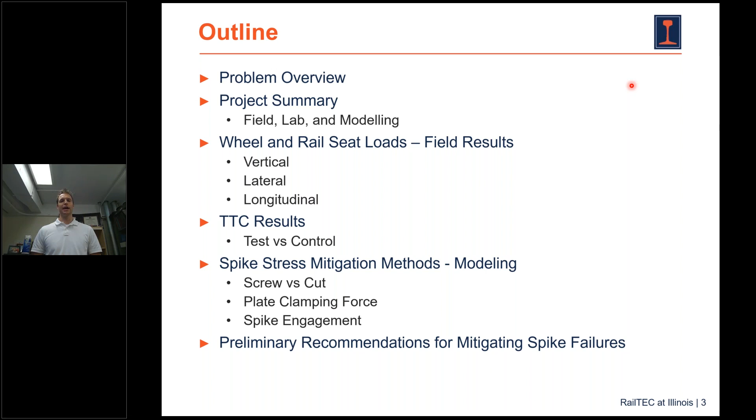with tonnage. And then finally, I'll wrap up by hitting on some modeling results that shed light on why we saw what we did at TTC, as well as give a couple other recommendations for how we might mitigate some of these failures moving forward.

So some background on these spike failures. I think we can very strongly assert that these failures are occurring due to fatigue. It's not a material deficiency, and this doesn't happen in just one type of elastic fastener. It's not just cut spikes—it can also occur in screw spikes as well. We believe this is overloading of the screw spike, leading to a fatigue failure, especially when we look at some of the failure surfaces.

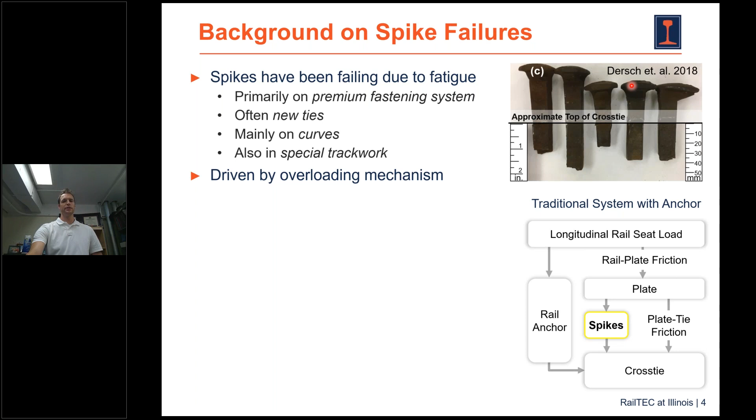Riley hit on this in the introduction. It's led to at least 10 derailments that we've been able to specifically link to this that's caused rapid gauge deterioration and wide gauge derailments. One of the most famous of which is the Mosier, Oregon derailment that occurred in 2016.

If you notice in the bottom right of slide 4, we have a very simplified version of how the load will be transferred from the rail to the cross tie. In a system that uses spikes and anchors, a significant amount of longitudinal load will actually go through the rail anchor into the cross tie, and some will go through rail plate friction to the plate into the spikes.

But the majority in these anchored systems with no elastic fastener will go through that anchor. We believe one of the driving factors leading to these failures within elastic fasteners is actually the loss of this anchor. Therefore we now see an E-clip that is bringing that longitudinal load into the plates, which means the spikes and the plate-tie friction now have to carry the entirety of that longitudinal load.

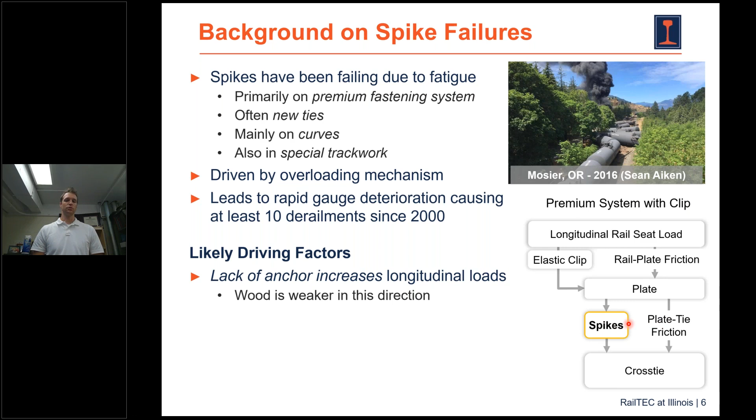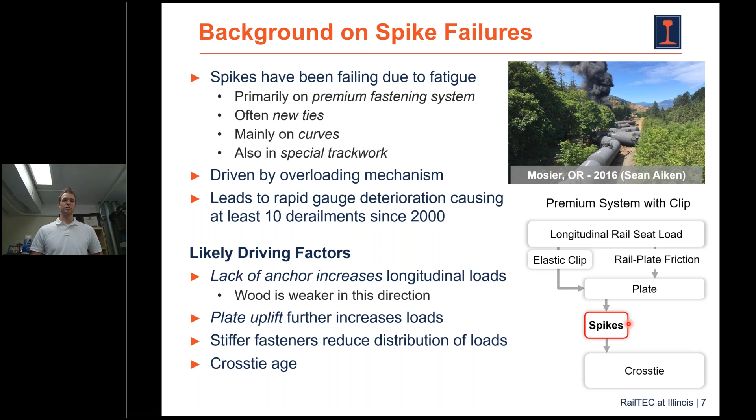To exacerbate this, or to increase the load magnitude on the spikes further, we know the wave action of the rail will actually lead to plate uplift, and so you will lose that opportunity for plate-to-tie friction. These spikes, which were only taking a portion of that longitudinal load, are now being required to take the longitudinal load in its entirety, plus the lateral load, which has always been present.

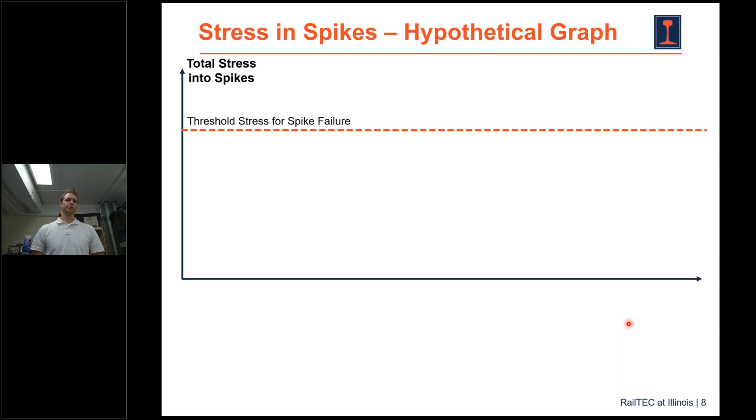So if we want to think about this in a visual way, we can look at a hypothetical graph where we're going to be looking at the total stress into the spike, and then looking at different scenarios. In all of these scenarios, we're going to consider the threshold stress for where spike fatigue failure would likely occur.

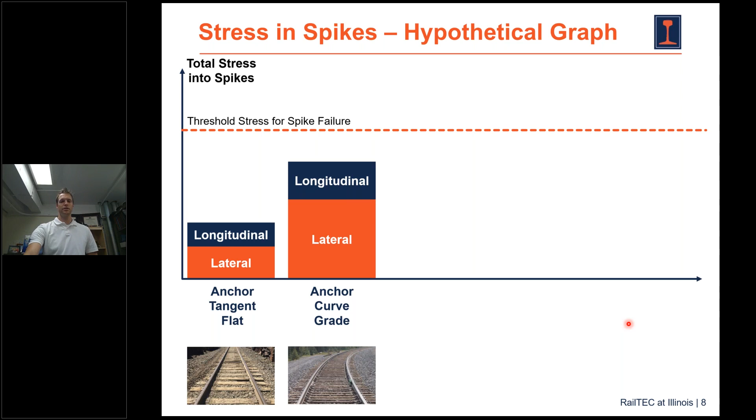So for anchored track that's tangent and flat, we would expect some level of longitudinal or lateral loads, but we'd expect this magnitude to be fairly low, definitely below the spike failure criteria. Once you go into a moderate or typical curve, the lateral loads would increase, but that longitudinal load is still not sufficient enough to cause fatigue failure to occur.

But in the extreme circumstance—again, this is not an elastic fastener, this is a cut spike with anchored system—an extreme grade, extreme curve, or special track work where the lateral loads are so high, you could go above this threshold for spike failure, and broken spikes have been found in these locations, but it is definitely not the norm. These anchored systems are everything to the left of this dashed line.

And whenever we think about elastic fasteners, so we remove the anchor from the load path, we go back to a moderate degree of curvature, and we realize that this longitudinal load is now increased within the system. This is just a way to visualize what we were talking about previously. Now we are asking the spike to take the same amount of lateral load, and we've increased the longitudinal load that leads to the spike failure.

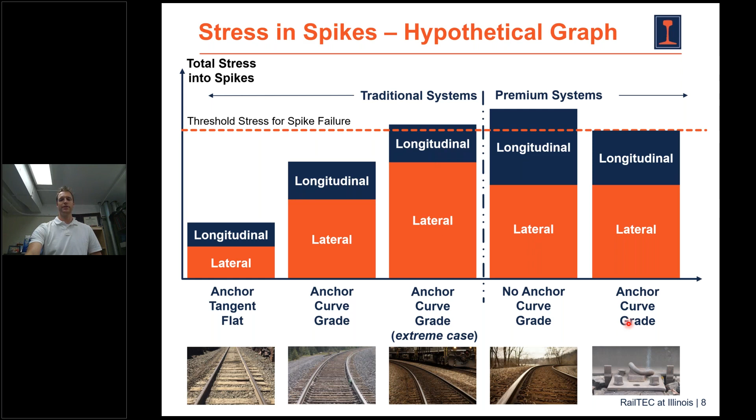One mitigation approach used by at least one railroad is reapplying anchors to these systems. It's believed that once you apply these anchors, the load path will be shared or taken by this anchor. This sounds great in theory, but anchors do not always stay engaged, and when they become disengaged, the longitudinal load increases. It was shown to have positive benefits, lower failure rates, but it did not completely fix the problem—failures still occurred even in territory with anchors.

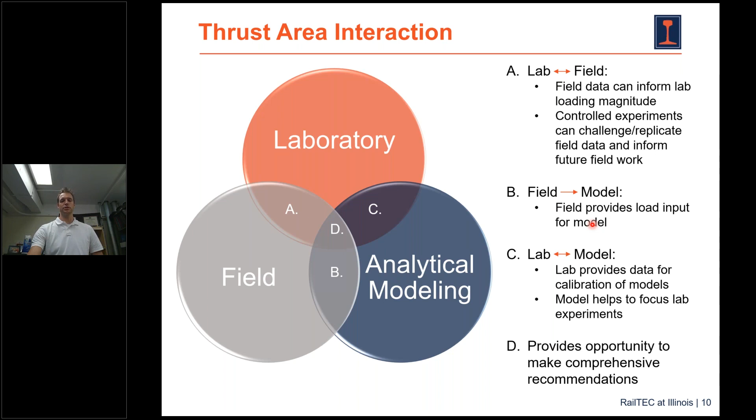So what are we doing at Illinois to address these challenges? We're taking a holistic approach: doing work in the lab, performing analytical modeling, getting out into the field to measure the forces and demands placed on these fastening systems, and getting out to TTC to test a novel type of fastening system to see if there's something we can change to help mitigate these failures. Each of these components informs the other, especially the lab and field data feeding into the modeling to ensure it's representative of reality. All of this ties together so we can make comprehensive recommendations on how to mitigate spike stresses.

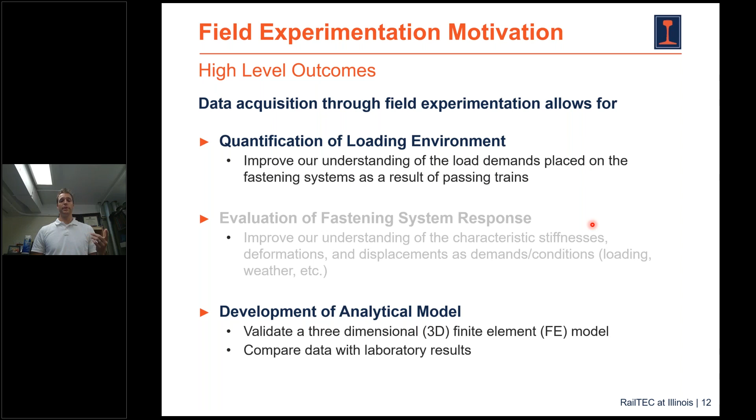I'm going to jump into the first thrust area I want to talk about today, which is quantifying the demands placed on the system. The high level outcomes are knowing the demands, but also providing data and information to the model. On slide 13, we have an overview of where we performed this field experimentation.

I want to once again thank Norfolk Southern for their support. Brad Kirchhoff was very supportive of this effort and really helped us out. They provided us track support on multiple days so we could get out and install our instrumentation. It was on a 3-track curve at Horseshoe Curve, on Norfolk Southern's Pittsburgh line.

This was a great opportunity because we had the high rail of track 3, the westbound track with the uphill empty trains. The high rail on these empty trains has seen the most failures of broken spikes at this specific location, whereas the downhill loaded trains have seen failures, but not at the same rate. Being able to come to a territory with different failure rates but the same curvature, grade, temperatures, and climate is a great opportunity to understand what's different.

One thing we're already thinking about is that tractive effort is going to be different. For these uphill empty trains, the longitudinal load is largely distributed within the locomotives themselves, whereas for the downhill loaded trains, air brakes are applied and the longitudinal loads can be distributed throughout the entire train. We were really excited to be supported by NS to get out onto their track to measure these forces.

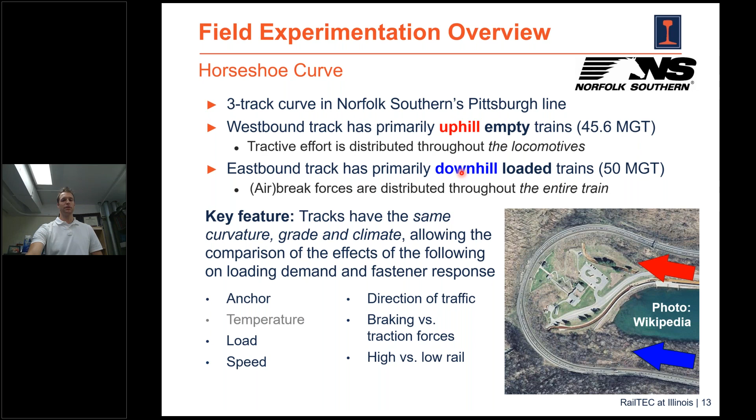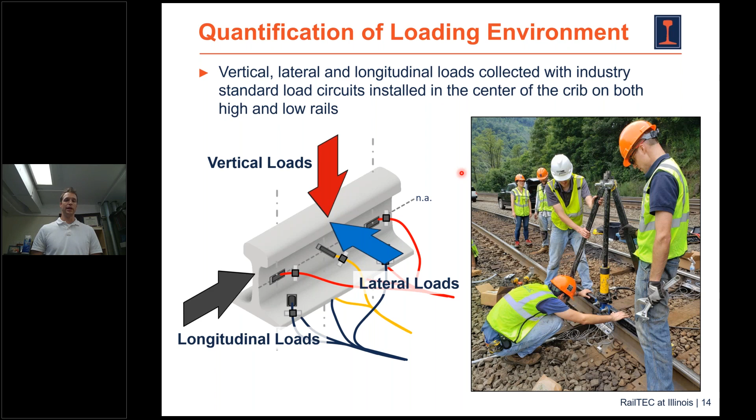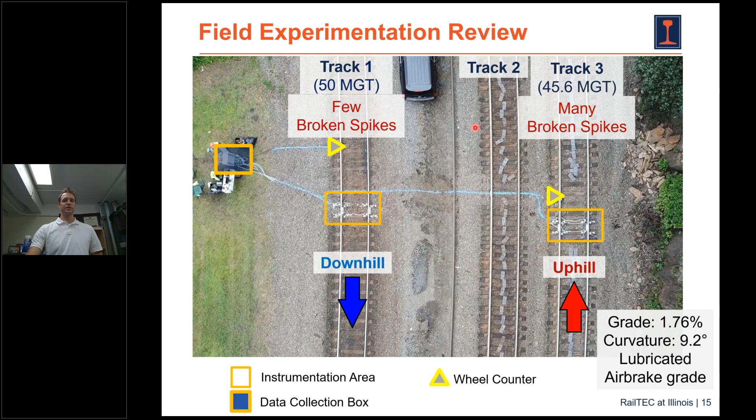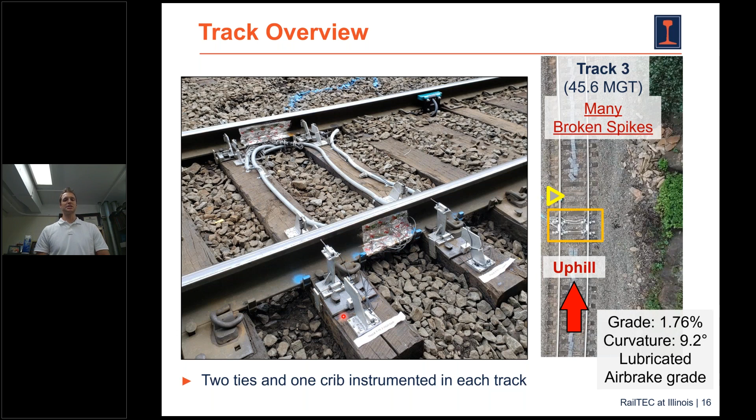As I mentioned, we monitored and measured vertical, lateral, and longitudinal loads on the high rail and low rail of both tracks 1 and 3. A bird's eye view of our site is shown on slide 15, with additional information about each track—grade, curvature, and the fact that it was a lubricated curve and an air brake grade. On slide 16 you can see a zoom in of our site, where our instrumentation was placed in the cribs for our loads. We were also capturing displacement data, but I won't be highlighting that today.

Jumping into the results on slide 17, I'll first orient you to this figure. We're looking at a percent exceedance graph, with percent exceeding on the vertical axis, vertical wheel load on the lower horizontal axis, and vertical rail seat load on the upper horizontal axis. We're taking the vertical rail seat load to be 26% of the vertical wheel load, assuming a 3,000 pounds per inch track modulus and standard sized axles.

We use the locomotive wheels for the diameter, and using Talbot's approach, we came up with 26% of that wheel load going into the rail seat. The first thing we notice is that the vertical loads on track 1 are indeed higher than on track 3, which is to be expected since these are loaded trains, so their loads should be higher.

A way to read this figure is if we look at 60% exceeding on track 1, so 60% of all loads exceed about 25 kips. Whereas on track 3, we're going to see that it ranges from 10 to 15 kips at 60%. So there's greater loads on track 1 than track 3.

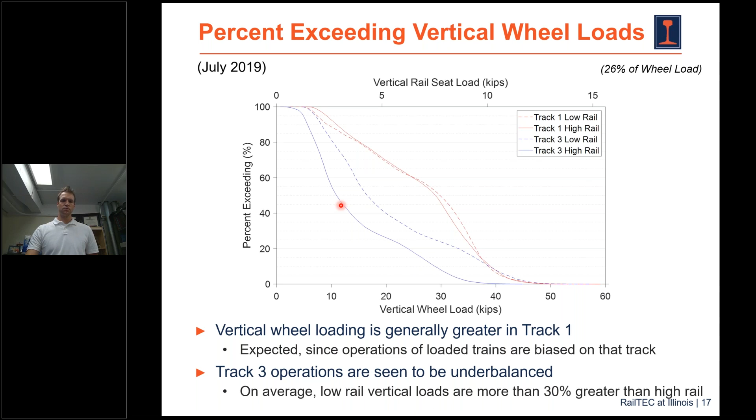The other thing that becomes apparent is that the track 3 operations are leading to an underbalanced condition, where on average, the low rail has 30% greater loads than the high rail. Or another way to think about that is the high rail is becoming more unloaded than the low rail.

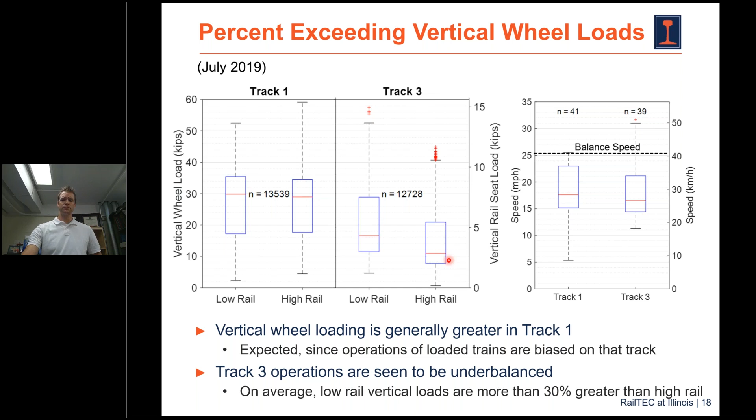As we move forward, we'll look at these lateral wheel loads. This is the same representation of percent exceeding versus our lateral wheel loads, lateral rail seat loads. In this instance, we're taking 35% of the wheel load to go into the rail seat, based on the literature of what is expected for the lateral distribution into the system.

Similar to the vertical load, we once again see that track 1's field facing or outward lateral wheel loads are greater in magnitude than track 3. And the other takeaway is that track 3 high rail has the highest percentage of gauge facing lateral loads.

That was something that became even more apparent when we looked at leading versus trailing trucks. There's definitely something we still want to dive into this data further to understand, but we already are saying that track 1 has greater demands, vertical and lateral, compared to track 3. But again, this is to be expected given the loading of the cars.

Slide 20 is just showing a box plot of the similar data, helping to better visualize the variance of the lateral load and see where the median is truly falling and how this data is scattered on tracks 1 and track 3.

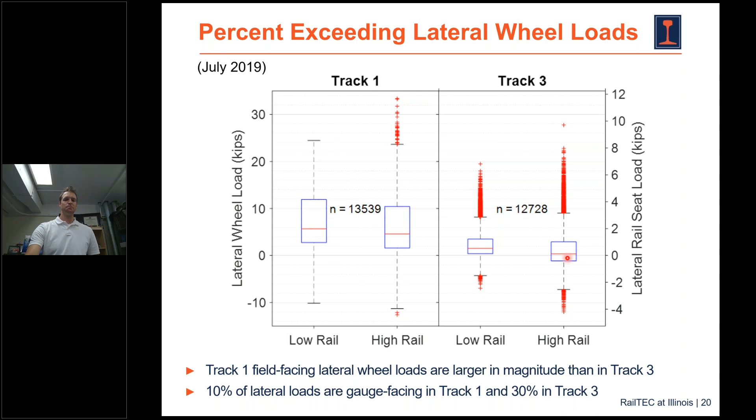The longitudinal load is definitely different. It's something we think about more in terms of rail neutral temperature, or understanding and managing the stress state of the railroad, whenever we think about axial stresses or the longitudinal stresses within the rail.

But what we wanted to do is understand what is the effect of a single wheel, what is the effect of these passing trains, the longitudinal effect on the fastening systems around the track.

This information comes from a book by Kerr from 2003. We can see this distribution of forces, compressive and tensile, which makes a lot of sense. But once we think about what the fastener feels, we realize that the fasteners are all providing forces in the same direction. Therefore, this made us want to look at the data in superposition instead of a single wheel.

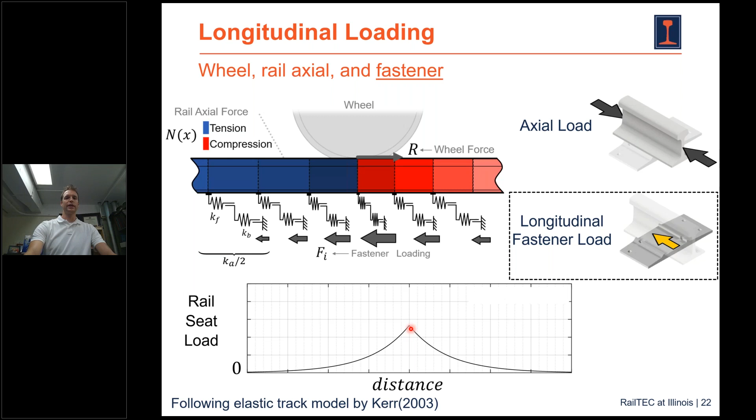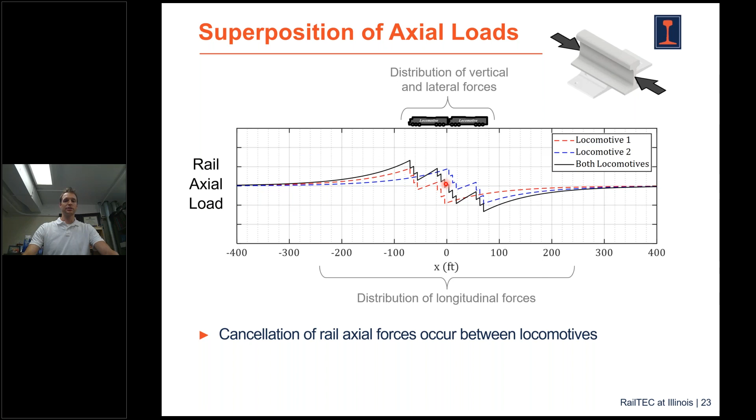We really wanted to start thinking about when multiple wheels are acting next to one another. So when we look at the superposition of these axial loads in the rail, we've taken a simple case of two locomotives. First locomotive is in red, second locomotive is in blue. We see there is an additive effect in front and behind these sets of locomotives, but in between, in this black line, these forces actually cancel one another out. The tensile and compressive forces cancel each other out, so in between the locomotives, there's actually zero additional stress added.

This is the opposite of what we see with the fastener forces, where between these same two locomotives, when we think about the superposition of all the wheels from two locomotives, the fastener loads become additive. Again, locomotive 1 in red, locomotive 2 in blue, combination in black. Our maximum fastener force is now between the two locomotives. This was good information to help calibrate our mental model of how these loads are applied to the rail and to the fastening systems, which is what we need to know to improve design or make recommendations.

One thing to keep in mind about these longitudinal loads and placement is that these waveforms are much longer than what you'd expect from vertical and lateral loads, which occur basically right underneath the wheel. The longitudinal loads are applied out in front and behind these locomotives. So you will get these highlighted yellow regions showing where you could expect plate uplift.

We have videos that confirm plate uplift occurs with these elastic fasteners, which attach the rail to the plate. Instead of having the plate or rail rise up from the plate in a conventional spike and anchor system, this elastic system pulls the plate up from the tie. So we're applying longitudinal loads at the same time there's plate uplift. That introductory slide showing this load now being carried by all the spikes can be better visualized, because these longitudinal loads are applied when there is uplift, which is not the case for lateral loads.

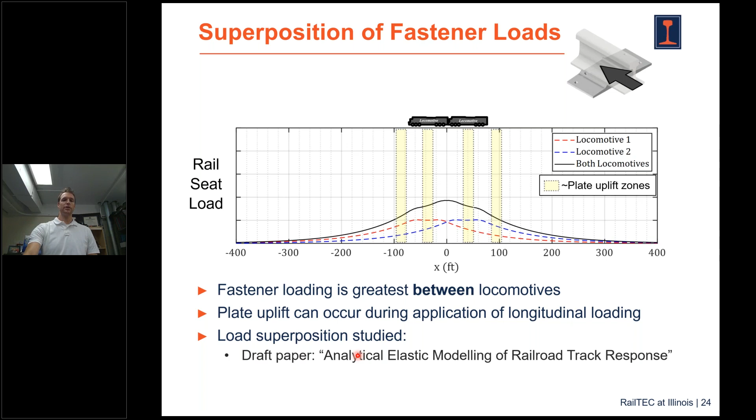For more information on this approach to going from a single wheel to superposition of multiple wheels, we've developed a paper currently under review, and the information within should help others better understand our approach in more detail.

One other consideration: since it's additive having two locomotives next to one another, investigating the effect of distributed power, whether a single tender or multiple units split within a train, once you introduce even a single car between two locomotives, we see a reduction, in this case 40%, of that fastening force going into any of the spikes or the rail seat. So it's important to realize there are things we can do to reduce the forces going into our fastening systems.

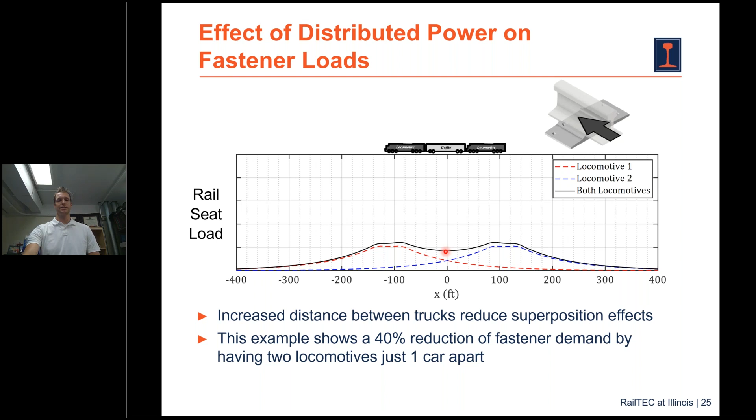So when we actually quantify the numbers we got from the field, we can see track 1's values are lower than track 3. In actuality, track 3 has 50 to 70% higher forces in the rails. But I want to pay attention to the magnitude of loads going into the fasteners. Keep in mind the vertical loads transfer approximately 25% of the load to each individual rail seat, and the lateral loads transfer approximately 35% of the load to each rail seat.

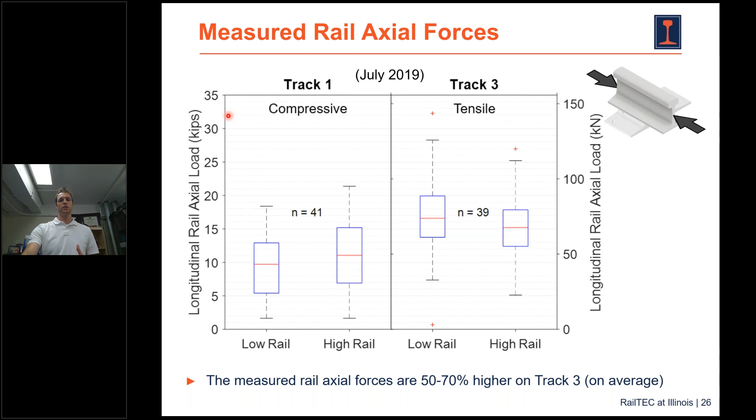But when we go from rail longitudinal loads to fastener longitudinal loads, our order of magnitude drops by at least one. We're seeing less than 10%, or maybe approximately 10%, of those longitudinal rail loads now going into the fasteners, which is different from how the vertical and lateral loads are distributed. Again, longitudinal loads on track 3 are greater than track 1. Keep in mind these longitudinal loads are applied when there is no friction, when there is complete uplift, so the entirety of the longitudinal load would be applied to these fastening systems.

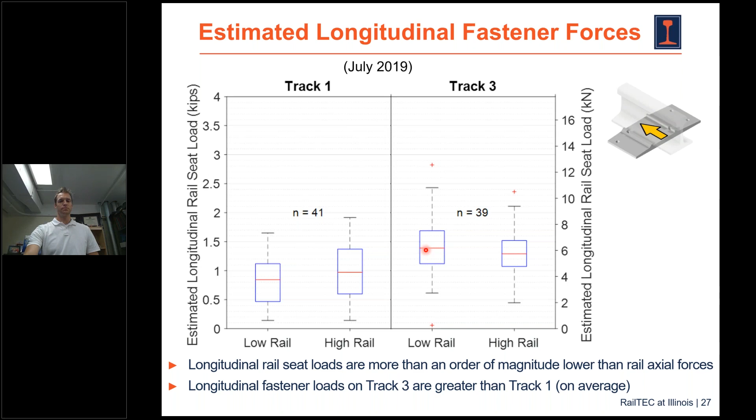I want to summarize the lateral and longitudinal fastener forces. Part of the reason why is to realize that it doesn't answer the full story. We haven't completely isolated why track 3 high rail has greater failure rates than track 1. For example, if we were to look at the 90th percentile lateral loads and the 90th percentile longitudinal loads on track 1 and track 3, we would expect fatigue failures on every rail. But in all actuality, we see most failures on the high rail of track 3 and some on the high rail of track 1. That still leaves questions in our mind of exactly why that's happening. We believe we really want to look into the effect of the vertical load and the friction.

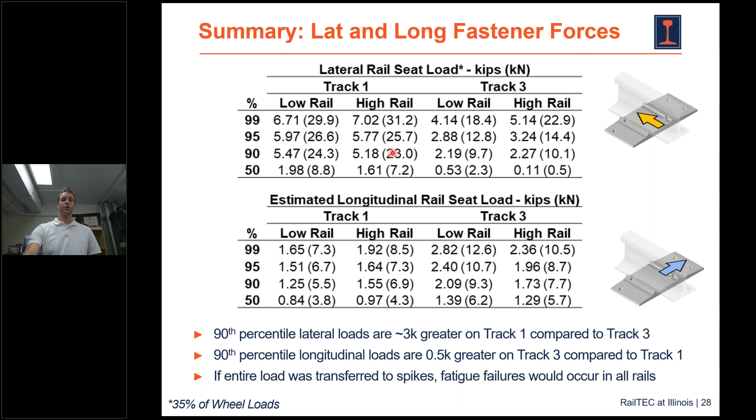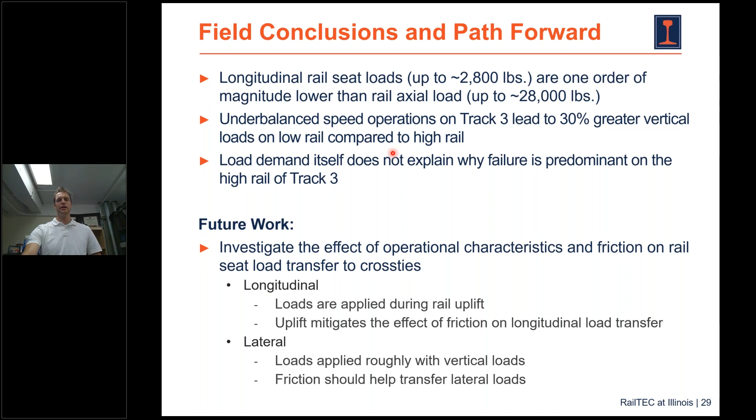I do have conclusions on slide 29 that I won't read through, but speaking towards future work, we want to investigate these effects of operational characteristics. What I mean is that underbalance on track 3 leads to lower rail seat loads. The median vertical rail seat load on the high rail of track 3 was only 3 kips, meaning the frictional capacity at that rail seat is much lower than at other rail seats with higher vertical loads. These are things we want to be thinking about moving forward, like how we can encourage additional friction or investigate this problem further.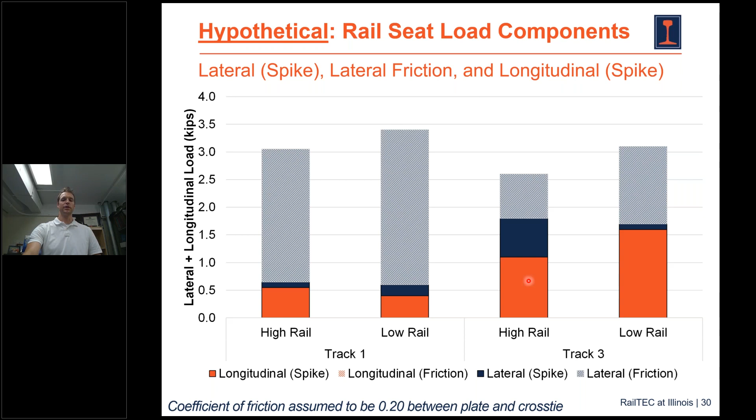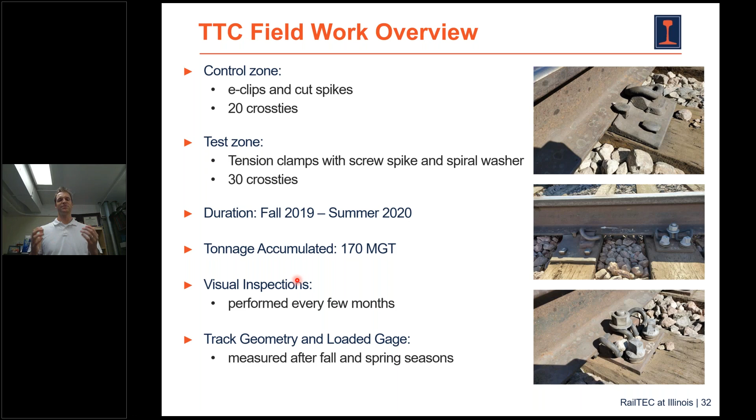The tension clamp does play a role too. I'll get into some of those results, but the spiral washer is having an effect, and I'll hit on why in a slide or two. The test occurred between fall 2019 and summer 2020. We accumulated 170 MGT and performed visual inspections every few months. Track geometry was measured after the fall and spring seasons, and loaded gauge measurements using a portable track loading fixture also occurred to help us understand how the system was behaving upon lateral load application.

Based on our visual inspection, our control zone saw 6 broken spikes, whereas our test zone experienced none. When thinking about loosened components, there were multiple spikes - not only did they break, but some uplifted from the plate slightly. In our screw spike, or tension clamp zone with spring washers, we saw 3 spikes that had backed out 30 to 45 degrees of rotation, which is 1 to 1.5 millimeters at 60 MGT.

There were indications of additional loose screw spikes after 170 MGT, but again only on 5 rail seats, and I don't have the ability to go into as much detail as before regarding the amount of rotation on these spikes. This would indicate there's potential for additional tightening or maintenance required if using spring washers, because things could become loose. But even with this 1 to 1.5 millimeters of uplift or rotation we observed, we still estimate the spring washers were able to apply between 2 and 3 kips of clamping force, similar to what they were originally applying.

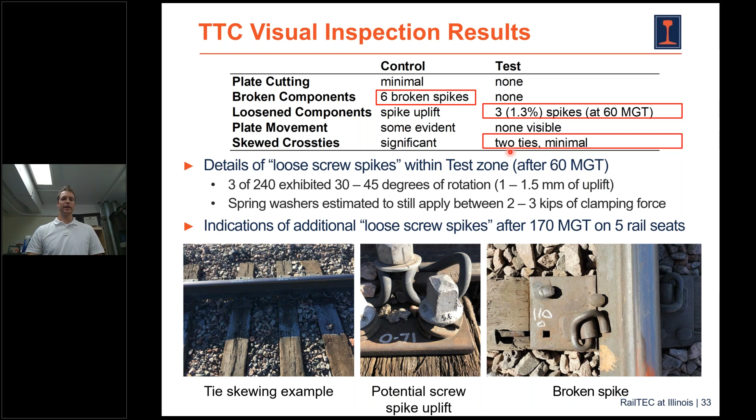Skewing ties with the control system was fairly significant. They had to go out into the field and reset these ties multiple times, whereas in the test zone it was done minimally. This could be because the shoulder of the control system was circular and not square, which could cause additional rotation of the system, leading to skewing of the ties. But it's definitely something to note as an example of things we noticed that were qualitatively different.

When we further dive into our data, we were looking at base gauge and head gauge widening at the base as well as at the head, really trying to understand what is different between these two systems.

One of the things we realized is that the system with spring washers really encouraged plate-to-crosstie contact and gave very consistent and low values of base gauge, which can be seen in this top right figure. It also provided very consistent clamping force, thus increasing lateral and rotational strength and stiffness whenever applying outward lateral loads.

Whenever we look at box plots for variability, we see additional scatter in the control compared to this tension-clamped spring washer system, which is able to reduce variability. When you reduce variability in how load is transferred, it also reduces the variability in what the spikes are feeling and being subjected to.

These data were taken with the test system in blue and our control systems in red, and they were both taken in December as well as after June, so after the fall season and after the spring season.

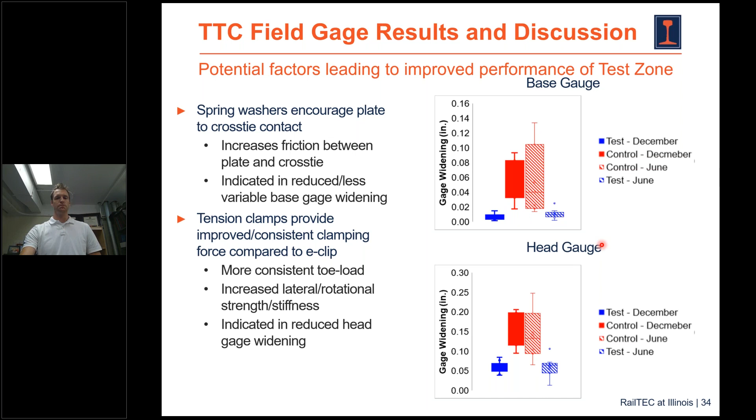This brings me to my last topic, which is giving an update on what we've been working on with our analytical model. Some of the motivation for the analytical model was being able to better understand the mechanics of why that one system worked better. Can we quantify the effect of that spring washer?

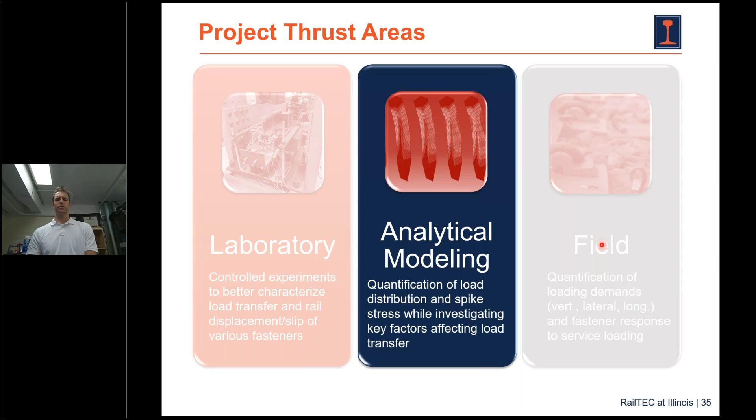But there are other reasons behind it that I'll get to after giving an update. We've had this model for this novel spike and timber interaction for a couple years, and the first thing we were able to find with it was...

That the longitudinal load is more detrimental than an equivalent lateral load. To put that another way, if you were to apply 2 kips of lateral load, you would get a lower stress response from your spike than if you were to apply 2 kips of a longitudinal load. This is due to the fact that timber is less resistant, or weaker, in that direction than in the lateral load direction.

The perpendicular-to-grain strength, which resists the longitudinal loads, is lower than the parallel-to-grain strength, which resists the lateral loads. So it's important to realize that you don't even need as high of a longitudinal load to lead to failure.

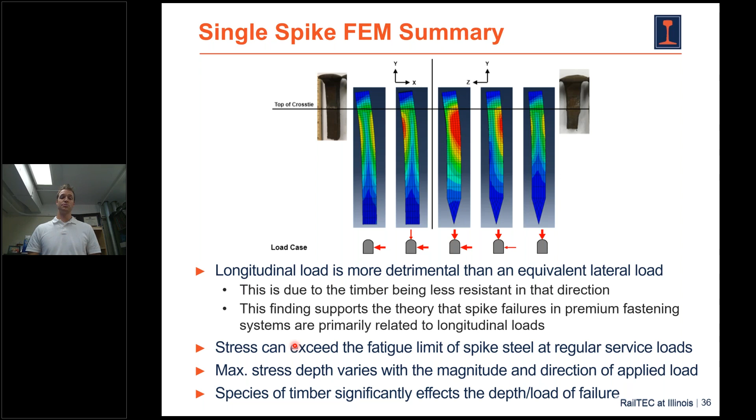We were also able to quantify that stress can exceed the fatigue limit at regular service loads. Maximum stress varies with the magnitude and direction of the load, and the species of timber does affect the depth and magnitude of stress.

But we've taken that model and advanced it a bit to start answering these questions: what can we do now? We understand there's a problem, and we've been able to quantify somewhat why that problem happens, but what can we do within the fastening system design to mitigate the stress and reduce failures?

So these are six studies we jumped into to understand what can we do. For time's sake, I'm only going to hit on three, and I'll allude to the results from the others. There's a paper coming out that will have a more detailed response from all of these as well.

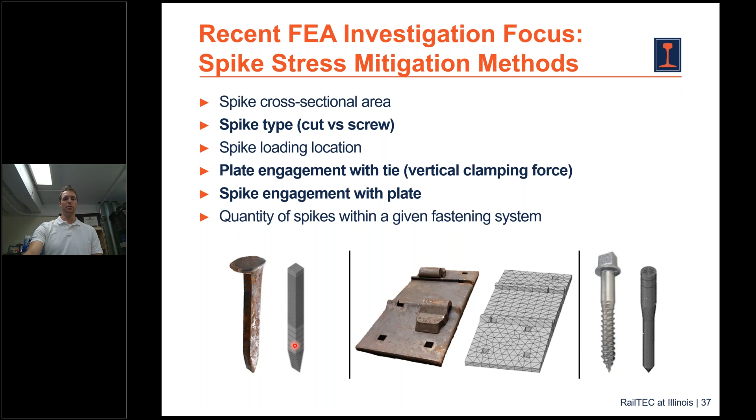But before I go into the results, just an overview of what the models looked like. From a very high level, each model was built to answer a specific question. Our model on the left is a single cut spike driven into a timber tie, and we use this to quantify the effect of cross-sectional area, load magnitude, and load location. It also gives us the control of what a cut spike is feeling in a timber tie.

The second model, seen in the middle, was built to answer the one question of how the performance of a screw spike compares to the performance of a cut spike.

So we can actually answer the question of whether there's any performance difference between cut spikes and screw spikes. The final model built and shown on the right is a single rail seat model with a half timber tie, a modeled plate, and multiple spikes driven into the plate. We can quantify answers to various questions with this, but specifically I'll highlight the effect of the spring washer, or clamping force between the plate and the tie, on spike stress.

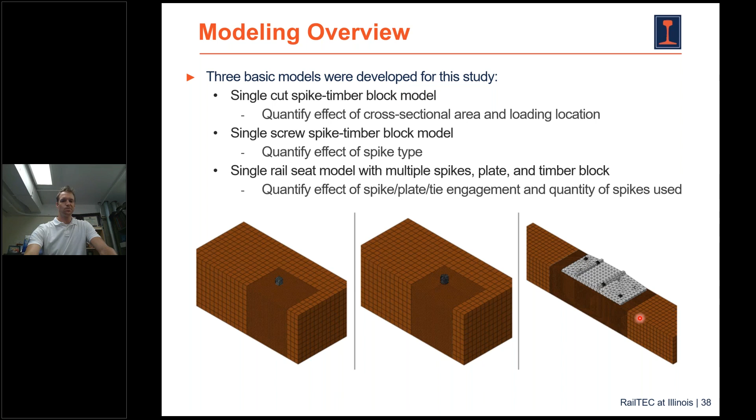A bit of background on why we wanted to investigate performance differences between cut and screw spikes. We know multiple railroads are moving from cut spikes to screw spikes, but we also know of one railroad that moved from screw spikes to cut spikes. Some perceived advantages from conversations with people in the industry are that screw spikes have higher bending strength and can have increased plate hold down strength, which is great.

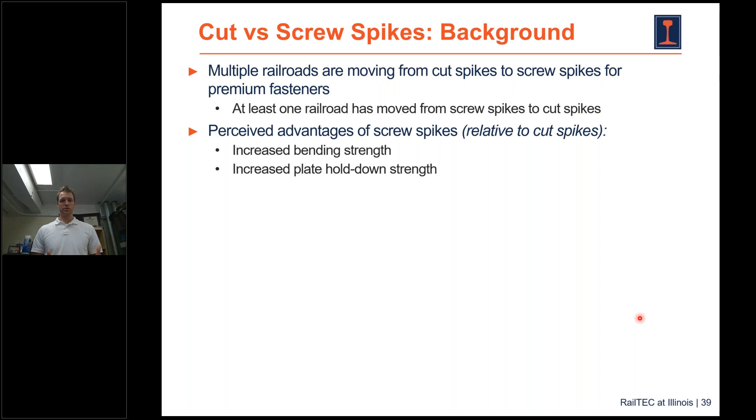If we put together a table of geometrical properties of these spikes, we have a cut spike, the upper shaft of a screw spike, and the threaded region of a screw spike. Quantifying their moments of inertia, we see the upper shaft of the screw spike has approximately 3 times the moment of inertia as the cut spike, so you should expect improved bending strength in the upper shaft. This is based on the simple analysis of MC over I, where increasing moment of inertia decreases expected stress. This value is 3 times larger, which is significantly different, so you should expect improved performance.

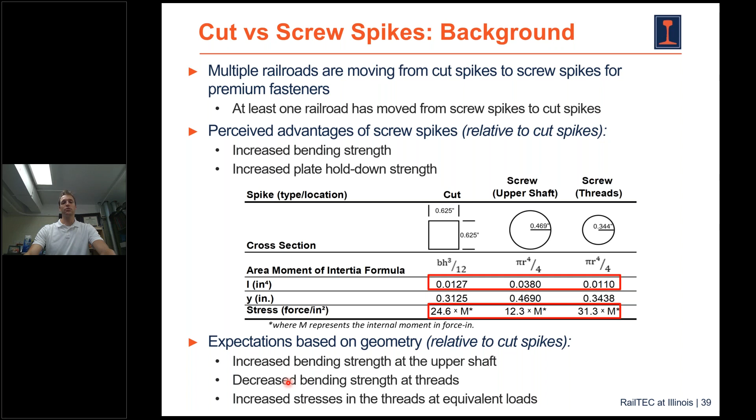However, when we look at the cut spike versus the threaded region of the screw spike, the moment of inertia is quite similar, and therefore the resulting stresses are also more similar. So our expectations, just from reviewing this geometry, say yes, you should see increased bending strength in the upper shaft. However, there could very well be decreased bending strength in the threads, and therefore increased stresses at equivalent loads. That's why we wanted to continue this study and look further.

Qualitatively, looking at these results on slide 40, we've subjected each spike to 2,500 pounds of longitudinal load. The first thing we notice is that the stress distributed within the cut spike is over a larger area compared to the screw spike, because of the tapering down to the threaded region, we now have a stress concentration.

We see that the maximum spike stress depth for the cut spike is approximately 1.5 inches below top of crosstie, which aligns well with field performance. When you find broken spikes in the field, they're on average 1.5 inches below top of crosstie. Our screw spike depth is lower because this upper portion of the shaft is larger, so you won't see as high bending stresses, pushing it down further to where the threads occur, about 2 inches. In this model, that's right around the first set of threads, which is also where failures have been seen in screw spikes. This gives us additional confidence in our model.

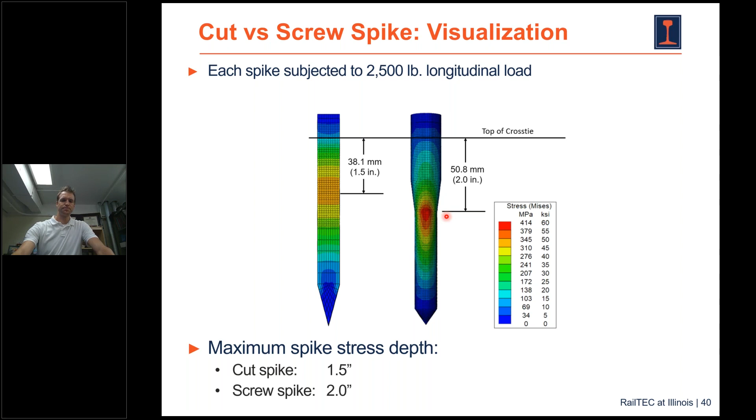When we quantify maximum stress on the vertical axis versus longitudinal force applied, below 2,000 pounds we see little to no difference between the resulting stress of the cut and screw spike, less than 10% difference at 2,000 pounds and lower. But beyond 2,000 pounds there's a rapid increase within the screw spike compared to the cut spike, which we believe is because of the stress concentration from the changing geometry. But for all intents and purposes, most spikes will not see greater than 2,000 pounds of longitudinal force application.

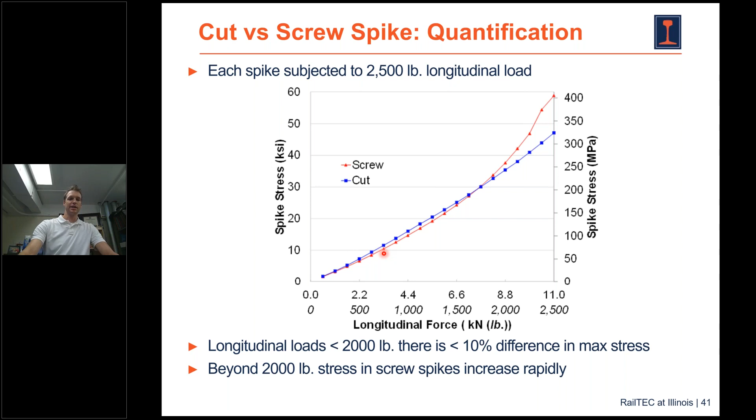Therefore, when thinking about performance differences between cut and screw spikes, there really is no expected behavior or performance difference when thinking about bending only. Screw spikes definitely have a benefit of better plate hold down, but for this specific case, bending strength should not be a consideration for switching from one to another. There are definitely other benefits, so take those benefits that come along with screw spikes.

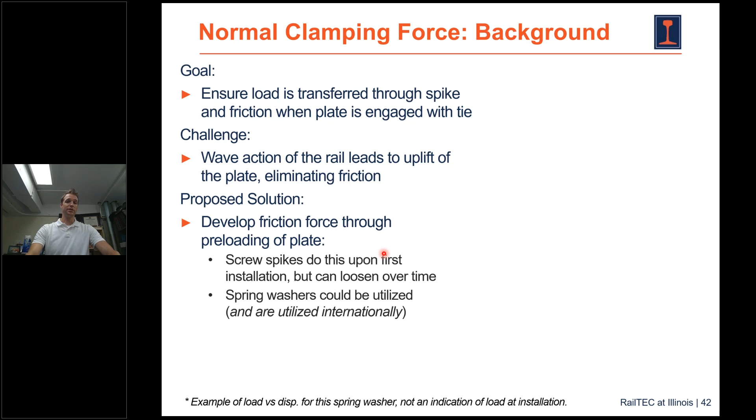The next study I want to hit on that our model was looking at was this normal clamping force, or the effect of that spring washer. The goal is to ensure that the load is transferred through friction as well as the spike. We really want to keep that plate engaged with the tie to allow friction to take some of the work, and therefore we have to account for this wave action of the rail. The proposed solution used out in the field is a spring washer, and that's what we wanted to model here.

I'm showing on the right-hand side of slide 42 an example load displacement behavior of one of the spring washers used in the field, which we've also looked at in the lab. One thing I'll note is there's a very steep slope, where very small changes in deflection or uplift of a screw lead to large changes in the applied force going into your fastening system. That's something design could reconsider, making it more compliant or having a greater working range to apply a specific load, as opposed to such a high magnitude. We'll come to see why.

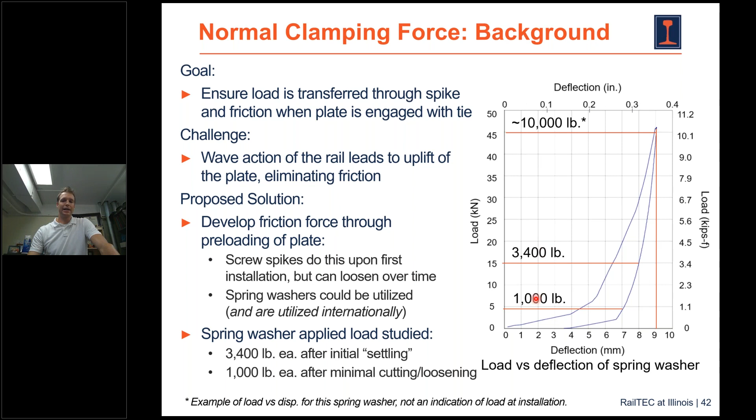For this specific study, we investigated the effect of applying 3,400 pounds per spike spring washer, as well as 1,000 pounds per spring washer. The thought behind this was you will rarely achieve your maximum applied load, which might be between 5,000 and 7,000 pounds per spring washer per spike. After time, there's going to be minimal or minor plate cutting, or as we saw in the field, backing out of these screws, which leads to a reduction in that spring washer force. So we wanted to look at these two magnitudes, which also seemed reasonable for what spring washers could apply.

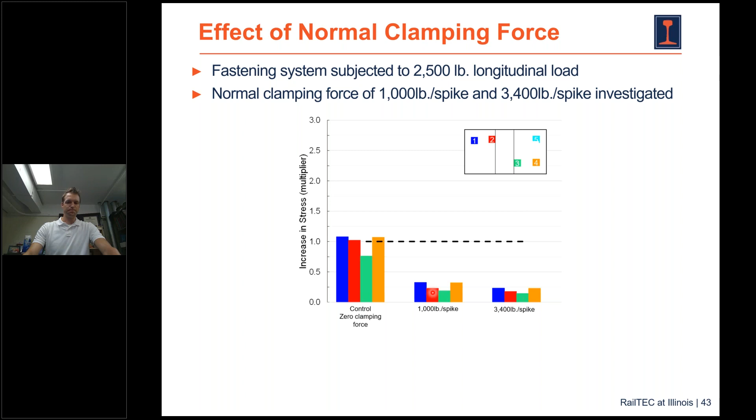We looked at three conditions. The first was zero clamping force, our control, where the nominal average resulting stress was 1 within these spikes. When we applied 1,000 pounds of force per spring washer per spike, we saw a 70% reduction. When we applied 3,400 pounds per spike, it was an 80% reduction. So this was a non-linear response in terms of what it took to reduce the stress going to these spikes.

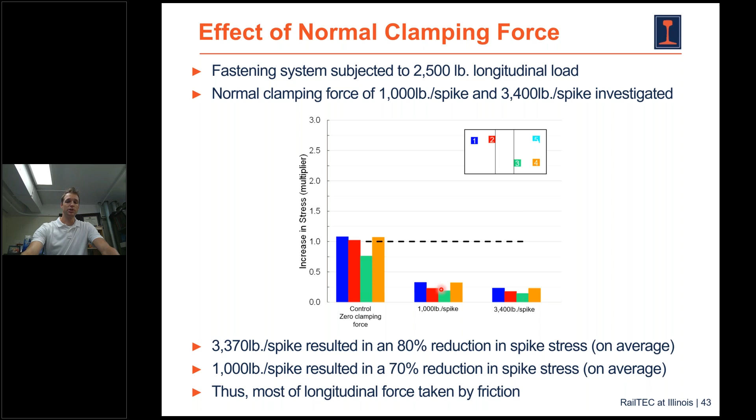This brings me back to the point that, based on this analysis, you don't need significant spring washer forces of 5,000, 7,000 or greater per spring washer. 1,000 pounds per spike gets you a 70% reduction in stress, which could be sufficient — it could be all you need. Having that greater working range, that displacement, could account for additional plate cutting or rotation, and would limit the amount of maintenance needed to keep the system tight and actually receive the benefits these spring washers provide.

Moving to my last mitigation method that we were able to look at with this model is spike engagement. Just a brief background: we know the plate hole tolerances are larger than the spikes, and the potential displacement when load is applied to these spikes or systems will likely not engage that spike if it wasn't engaged to begin with. I have specific numbers listed on this slide to show how much larger the holes are than the standard cut spike.

So it's reasonable to believe and see that not all spikes will be in contact or will have the same level of contact at any one time. This has been documented in our lab studies, as well as work others have performed in the field. Randy Bowman of NS and TTC have also quantified that there is a non-uniform distribution of forces within the spikes, and it makes sense because of these tolerances.

What I mean by engagement on this next slide, whenever I talk about disengaging the spike, you'll see that if we have a vertical load being applied from the top of the slide coming down, this spike would be engaged. It is within the load path.

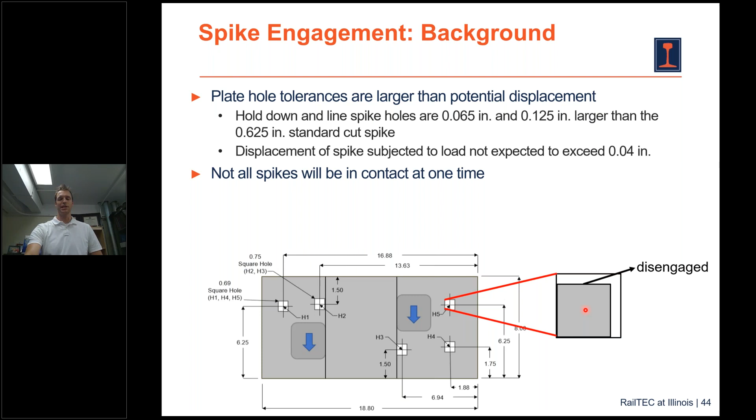A disengaged spike, by our definition, is when that spike is moved. It stayed within the fastener, but it's been moved to the opposite side of the tolerance within that hole. Now that same load, coming from the top of the slide to the bottom, the spike is no longer within that force chain and therefore will not provide any support until the plate moves the sufficient amount to close that gap. So it is disengaged.

So when we look at the results in slide 45, the effect of spike engagement with the plate, we have the same system, spikes 1, 2, 3, 4, 5. Our control is on the left. Again, the nominal case is when the stress is 1. What happens, or how does the stress change as we disengage a spike? Our legend shows a spike is within the load path, or engaged, when the background is white, and it's disengaged when the number background turns black. For example, spike 1 is disengaged in this instance, as are 2, 3, and 4.

The first thing we notice is that when this spike is disengaged from the load path, it truly acts as though it was removed from the system. I want to reiterate, the spike was still within the model, but the displacement was not great enough to re-engage the spike.

The other item we notice is that the load is not evenly redistributed among the spikes. For example, when we remove spike 1, the stress is not redistributed to spikes 2, 3, and 4 evenly. It's largely redistributed to spike 2. The same can be seen whenever we remove 2, 3, or 4. Largely, that stress is distributed to the adjacent spikes as opposed to all spikes evenly.

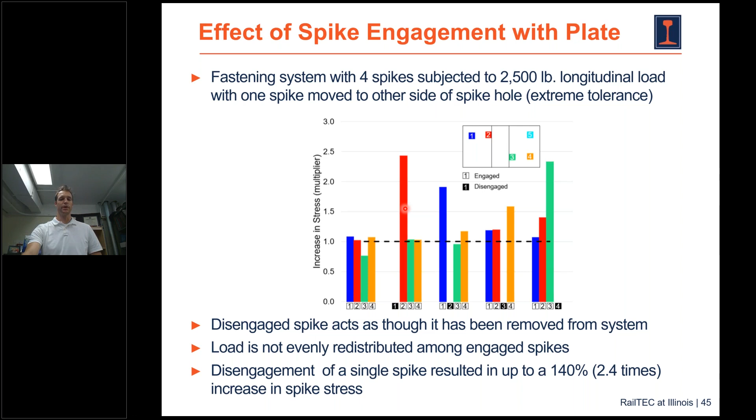So some of the conclusions: a disengaged spike can lead to large increases in the other spike stress and is not uniformly distributed. A clamping force of only 1,000 pounds can reduce the spike stress by 70%. And there's little performance difference in bending between cut and screw spike strengths, especially below 2,000 pounds applied longitudinal load.

Bullets 4 and 5 are from studies I wasn't able to highlight, but the full studies as well as those results will be presented. A draft has been submitted, and we're currently working on addressing comments and moving this paper forward, on methods to mitigate railway premium fastening system spike fatigue failures using this FEA approach.

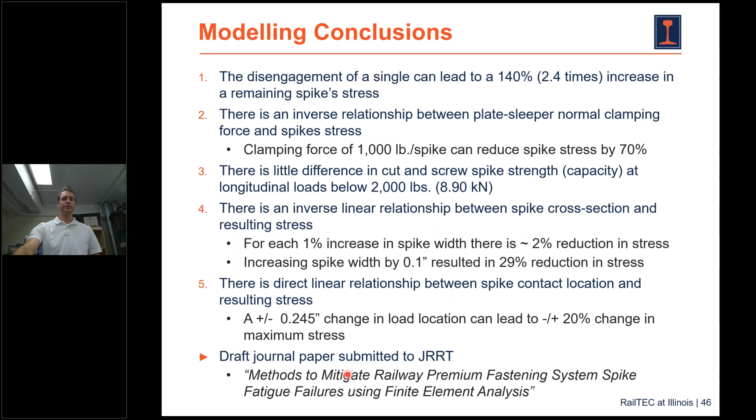So whenever we take into account lessons learned from the work out in the field and what we've seen through the model, we can make recommendations to mitigate spike failures through operations as well as through fastening system design. Through operations, we want to consider reducing longitudinal demands when feasible by distributing power. We saw that reduces the demands on the fastening system itself, evenly distributing the tractive effort among multiple units. These slave units can try to improve how everything is evenly distributed among them, among every wheel on the train.

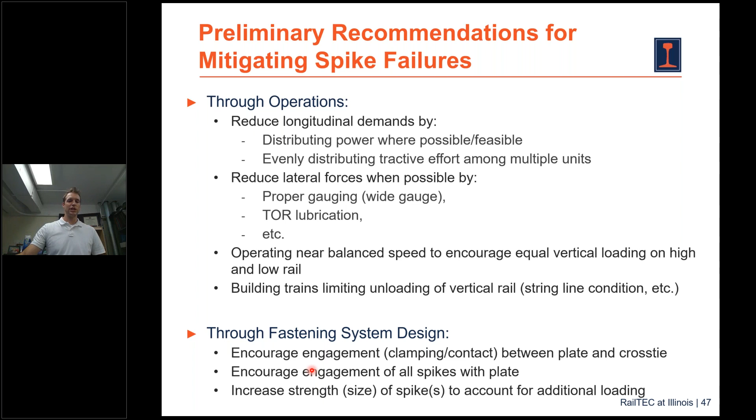We also want to encourage the engagement of all spikes within the plate. Being able to change the design or change tolerances when feasible to better encourage that all spikes be engaged could definitely reduce the amount of stress that any one spike feels. One last thing is increasing the size of the spike, increasing its bending strength to account for any additional loading. This could also be an easy fix that doesn't really change maintenance practices. It just changes the design and the plate, which has its own challenges, but it's definitely feasible to do.